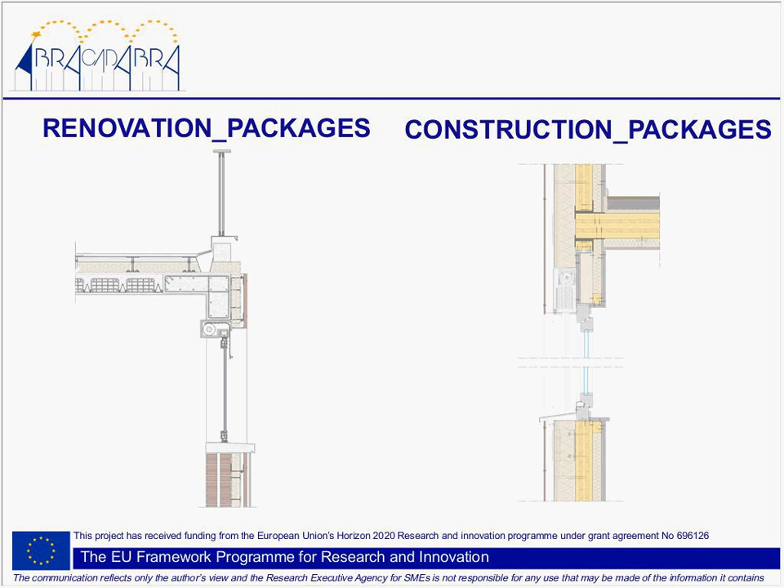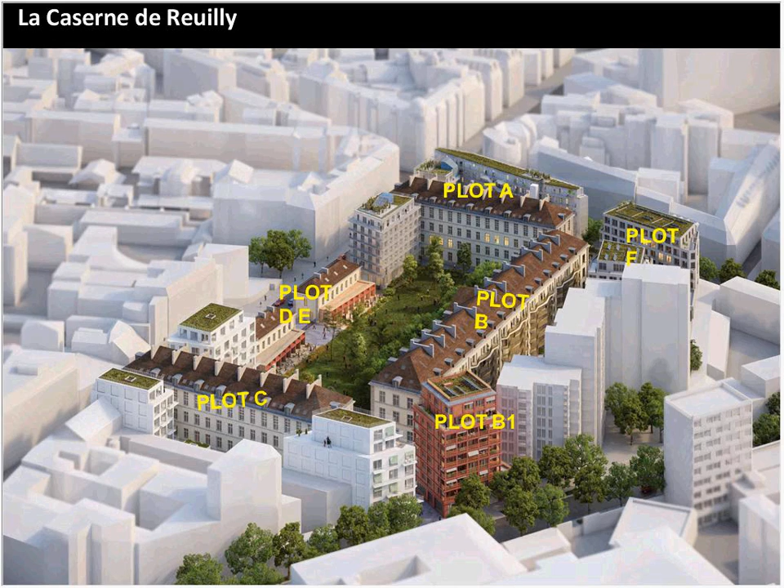This approach gives you an idea of how social housing providers think about extensions as a global solution, not only for energy renovation, but also in terms of neighborhood development. So the next slide, please. Do you hear me? Can you pass the next slide? Yes, thank you. So it's just very briefly an idea of the map of what has been done, but we're going to the next slide as well, because we're going to discuss an extension project in per se. So please, can you put up the next slide?

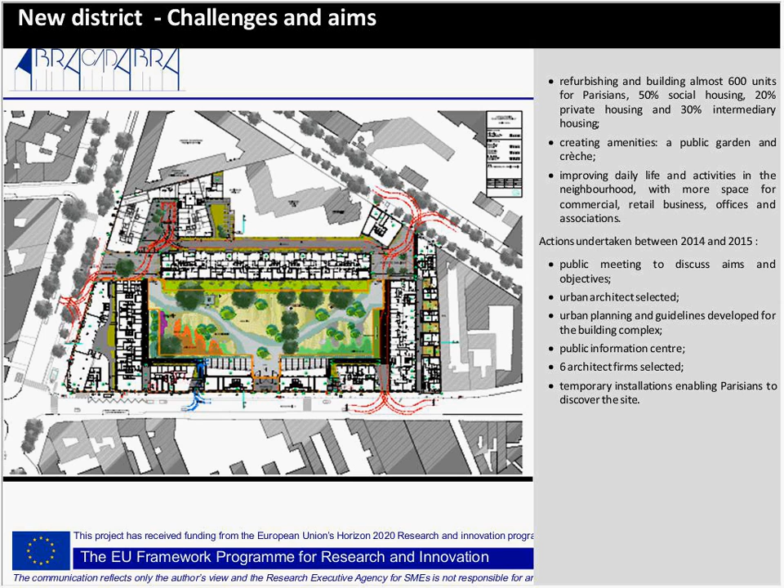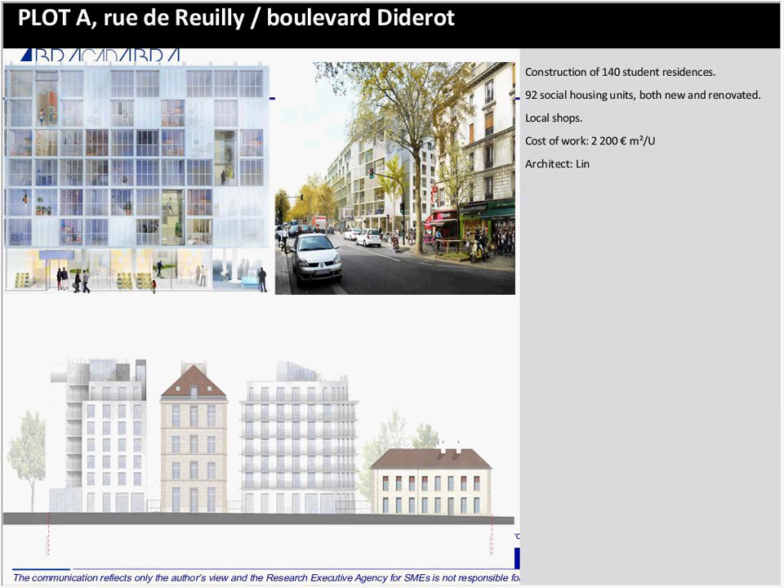You see on the side of the screen the different extensions. You see typically the old buildings, and in between the new buildings that will be added. So that's a specific form of add-on where we do side extensions, while preserving the architectural heritage or legacy. Can you please put the next slide?

That's interesting, but look at the position of the new buildings. You see here on the right side the older building, and now in the middle the new buildings, and in the background the typical Parisian buildings. In the middle a garden has been created, so it gives the idea that when there is a building extension, it's not only about energy efficiency—sometimes that's not the primary factor, but it will be an addition to that.

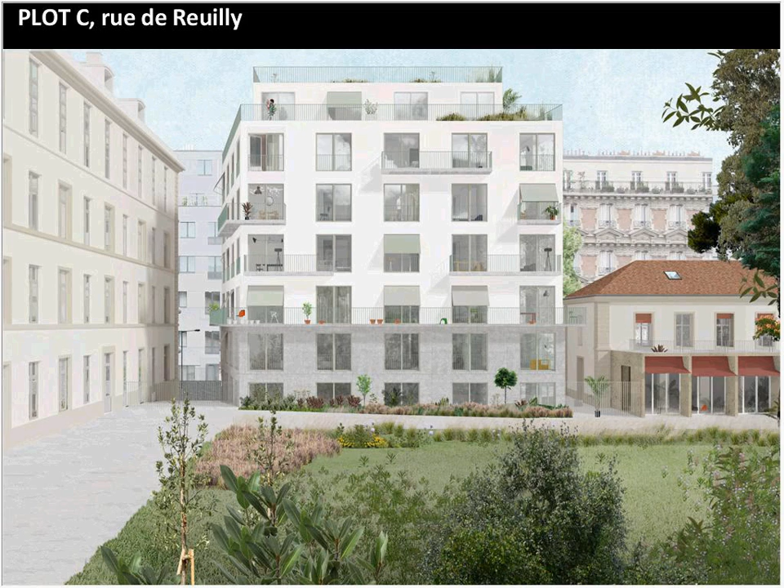So the next slide, please. Now we're going to see a project where it's really about extension on top. In Paris they call it using the land in the sky. It's building in densely populated areas where land is expensive. There's a necessity in Paris, and in other big cities in Europe, to find cheap land, and the cheapest land is the sky, in a way. So they call it using land in the sky, or sky as land. You see examples here, and the next slide will show more detail.

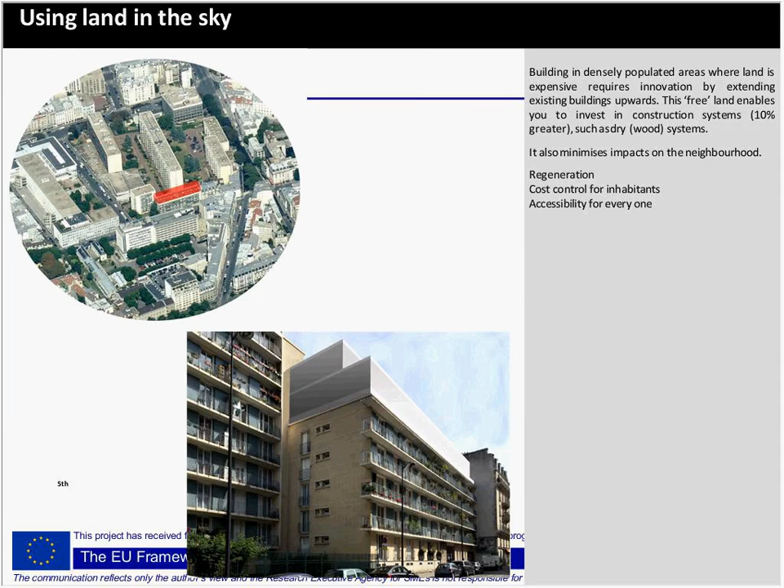This is an example in Paris, where they decided to refurbish an existing building and add units on top of it. You can clearly see that in the first picture at the top. This is an overall development where they will renovate existing buildings, create 72 new units, new elevators, and do a whole refurbishment.

The overall energy consumption of the building will go from label E to label B, so this is really a strong improvement. The total cost of renovation is about 34 million euros, and most of that—the extension—is 18 million euros.

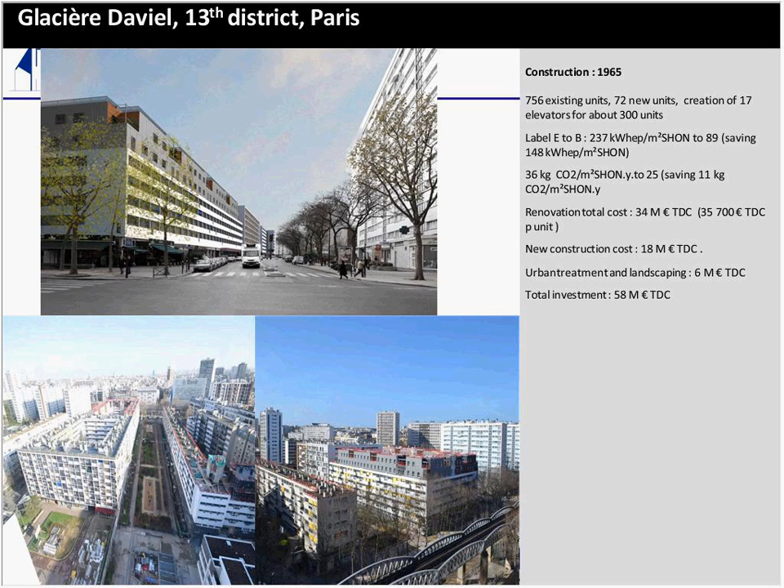Now, the big question we ask each time through Abracadabra is whether or not the building extension is a way, or something that will help finance the renovation. As we're going to see in the next slide, it's a big question mark—it's not easy to answer straightforwardly. So this is again some pictures.

The question is: could we finance the thermal measures for existing buildings without assistance, but with cross-subsidization from higher rent for the new buildings or sale of the new buildings? And another question: if yes, can we at least preserve affordable rents in the new dwellings, or are rents at market conditions economically necessary?

That means when housing providers decide to do an extension of the building, will they be obliged, in a way forced, to rent their new dwellings at a level close to the market rent?

Another question: can extensions modify the business model of renovation in general in the long term? Are urban legislation stumbling blocks for the widespread use of building extensions? Indeed, we heard from Spiridon that it might be a big obstacle.

Can residents be involved in the design and implementation of a building extension? How can resistance be dealt with? We must be careful not to underestimate the fact that people are not always happy about having a building extension, so there's a lot of work to do on that.

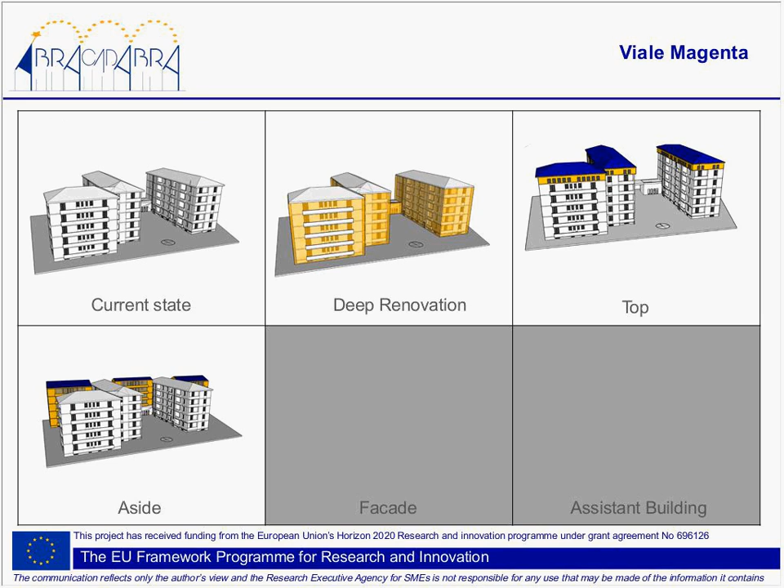The first study was a feasibility study of different add-ons. You can see that in this case it was not possible to add a façade addition or an assistant building. Related to this is the energy consumption before and after the deep renovation intervention, showing the current state consumption during the heating season and the energy consumption after the deep renovation. We can see there is a reduction of 40%.

We did the payback time of different scenarios. This one is the deep renovation, and we can see how we have a payback time of 35 years.

Top addition, being the study on the real estate market, we see how selling the new units we have a payback time of 20 years, and renting the units we have a payback time of 27 years.

While the addition aside with a higher number of new units to sell or to rent is reduced to 1 year in case of selling and 17 years in the case of renting.

We have the value of the building rated differently for each scenario. This is at the same time the most expensive one, but also the most profitable.

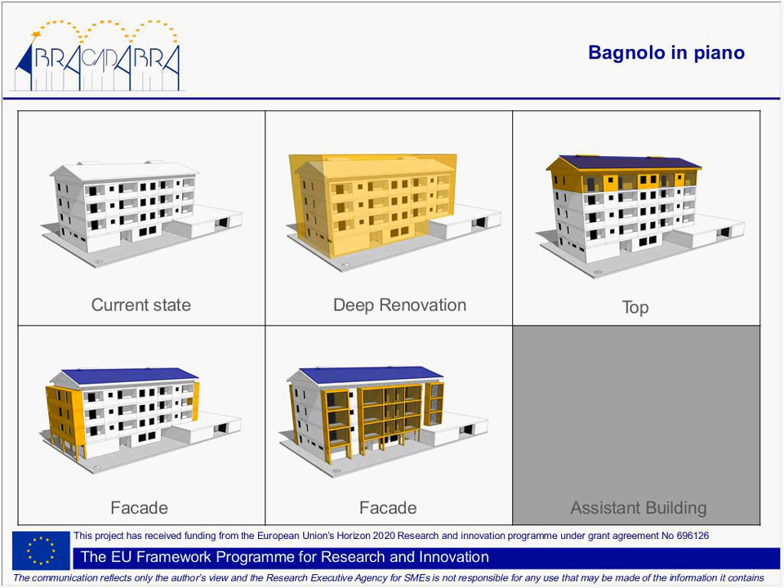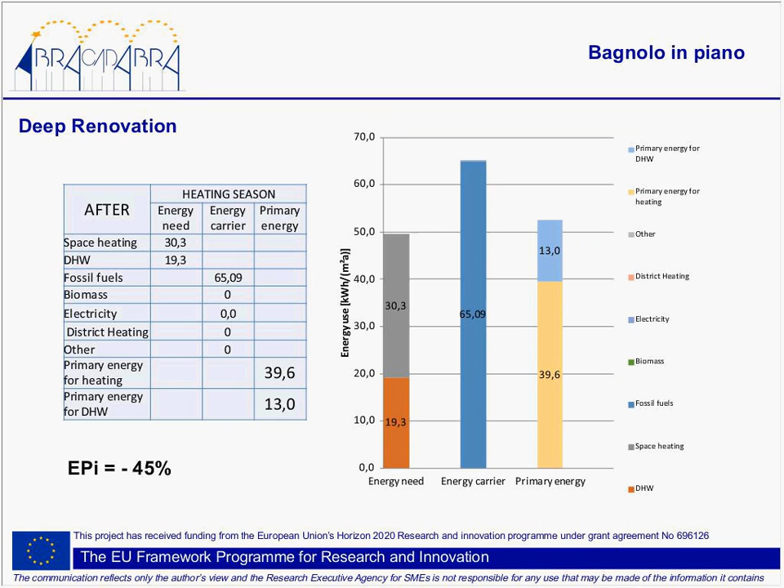Again, consumption analysis was the first step. These are the consumptions of state. And with renovation, we have a reduction of 45% of the energy of the primary energy index.

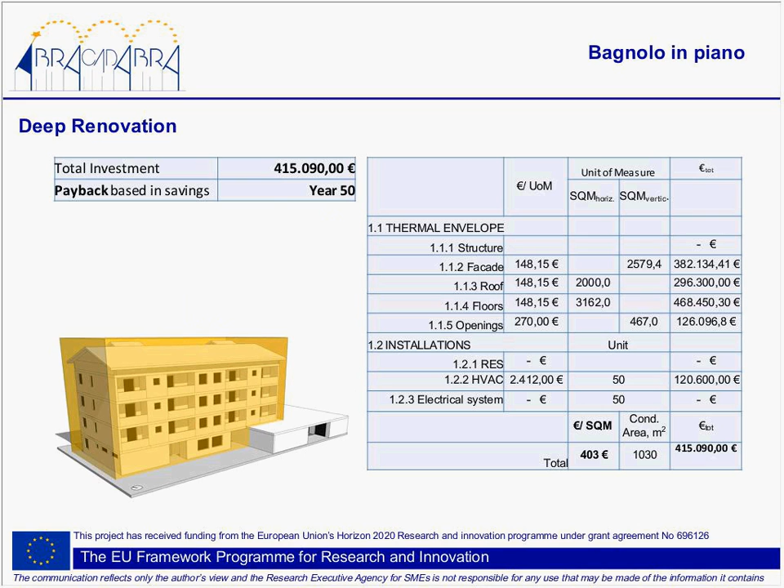We see the addition on façade. It has 1 year of payback time if we sell the renovated units, and 9 years if we rent the renovated units with higher monthly cost.

Comparison of the investment, and we saw the addition on façade is expensive, and it could be considered not convenient because it doesn't create new units to sell. If we look at the impact that it brings to the original building, it can be a very interesting option.

Result brings to consider a combined scenario: addition on top plus addition on facade, with the most profitable and plausible option, which is units on top addition, including the renting of the renovated ones. In this, we'll have a payback time of 2 years, and this is a very interesting scenario in social housing buildings.